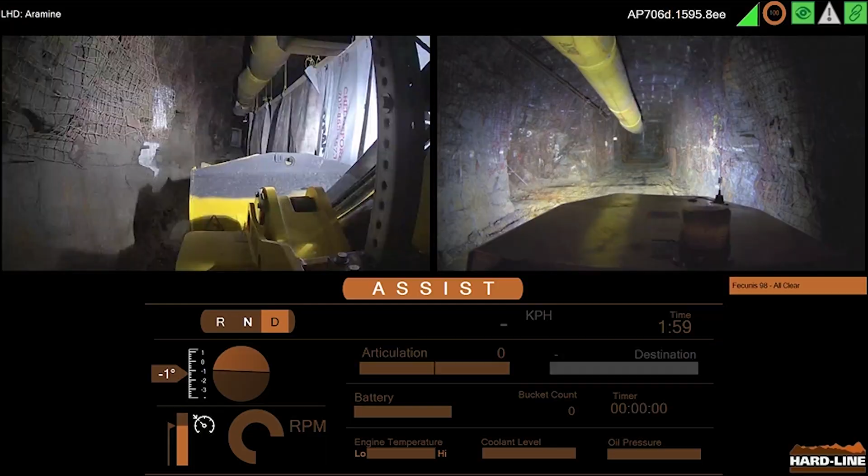Over the next hour, we're going to be showcasing some of our technologies, specifically Teleop Assist. We'll see a vehicle being operated at a mine about 50 kilometers from our location here in Sudbury. The operator will be in Sudbury, Ontario, with the machine in Onaping, Ontario at the NORCAT test facility, being operated both in teleoperation and using our semi-autonomous Teleop Assist functionality. We'll also showcase some of our other technologies and add-ons, and how they interact to give an overview of the different technologies.

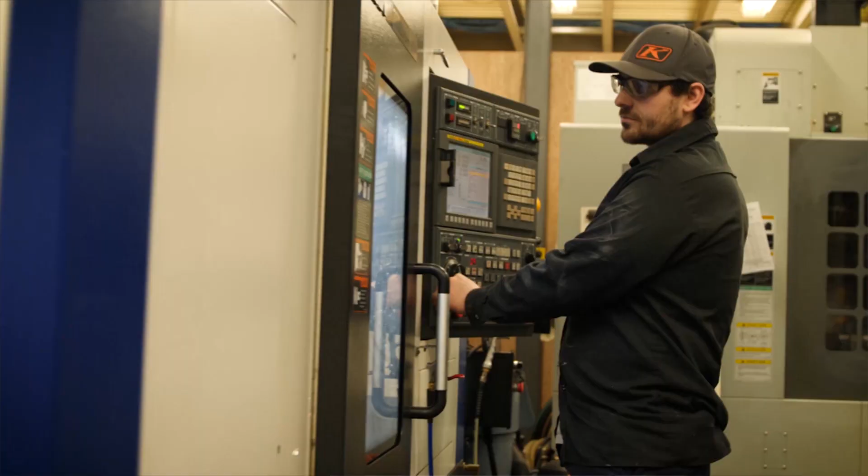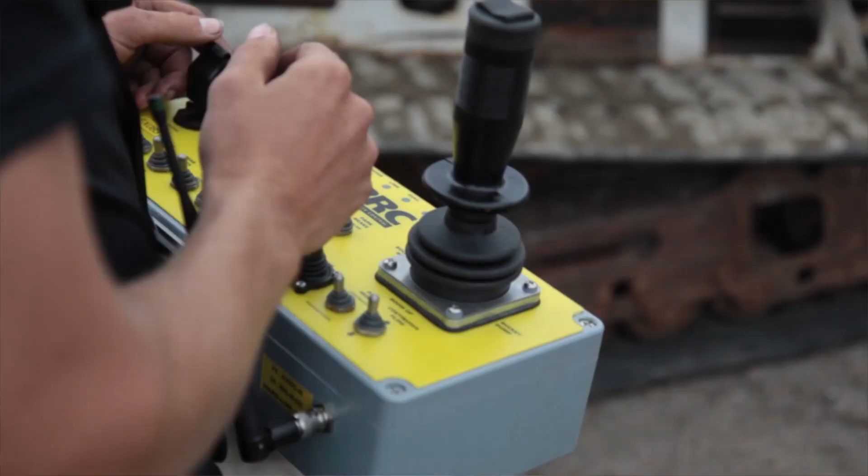Hard-Line is primarily a technology company. We develop, design, manufacture, test, install, and service our products globally all over the world. We've developed several technologies in remote control, teleoperation, semi-autonomous, and autonomous systems for various types of vehicles. We're actually 25 years in existence, starting in 1996, and over those years we've developed many things we'd like to show you today. We started as a service company here in Sudbury, Ontario, and over the years developed our own products, installing them all over the world on various types of equipment, whether remote control, tele-remote control, or autonomous operation.

We started in Sudbury, Ontario, and that's where I am currently. We have two offices here: our manufacturing and headquarters based in Dowling, and our technology center, which is fairly new, in downtown Sudbury core, where development, design, and software development is handled. In addition, we have offices in various parts of the world, including Salt Lake City, Utah for the United States, Santiago, Chile, and Lima, Peru, that handle our South American operations.

And speaking of those offices, we'll actually hear from them right now.

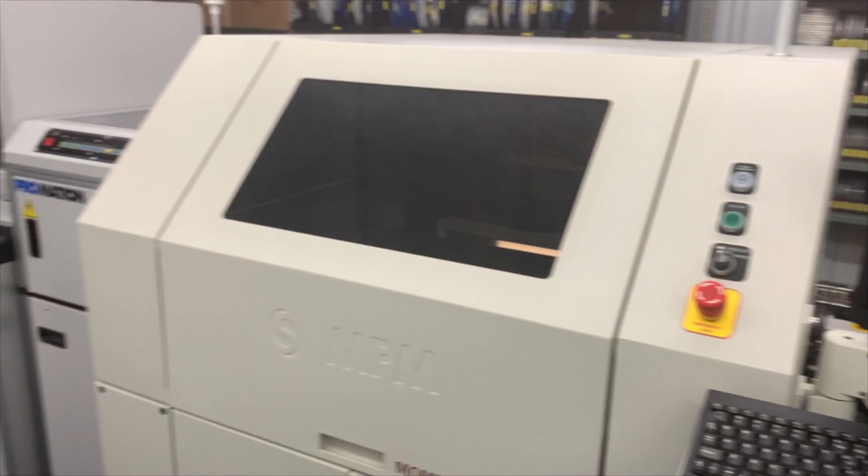Hi everybody, my name is Patrick Roy. I am a service technician for Hard-Line. Here I am setting up Teleop in Northern Ontario.

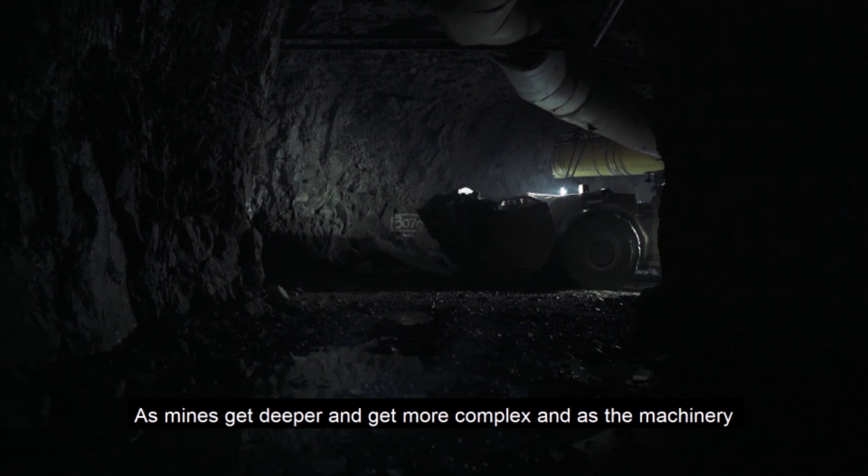Keeping a very strong bond between industry and academia ensures that the courses we offer are relevant. It also means that graduate students we produce from our department have advanced level skills in those areas as well. As mines get deeper and more complex, and as the machinery gets more complex, our technology allows them to be automated.

We have a huge supply of talent. We have leading academic institutions. We have engaged government that supports and cares about the future of the mining industry. Think of how Hard-Line is redefining what it means to have a job in the mining industry.

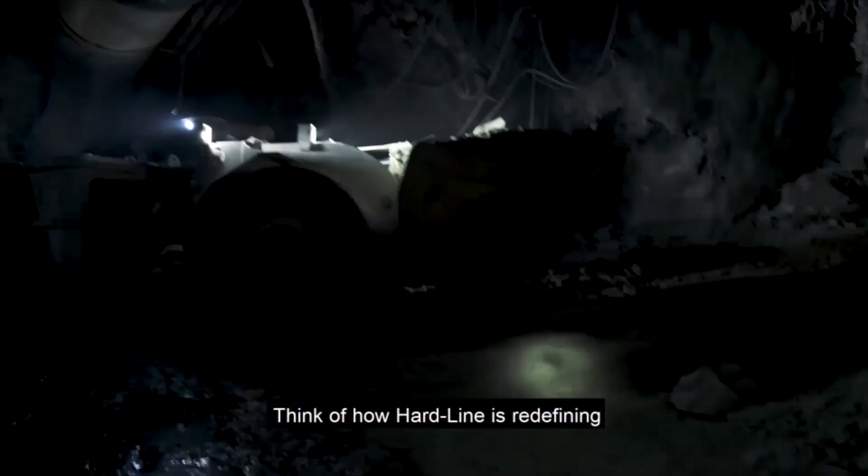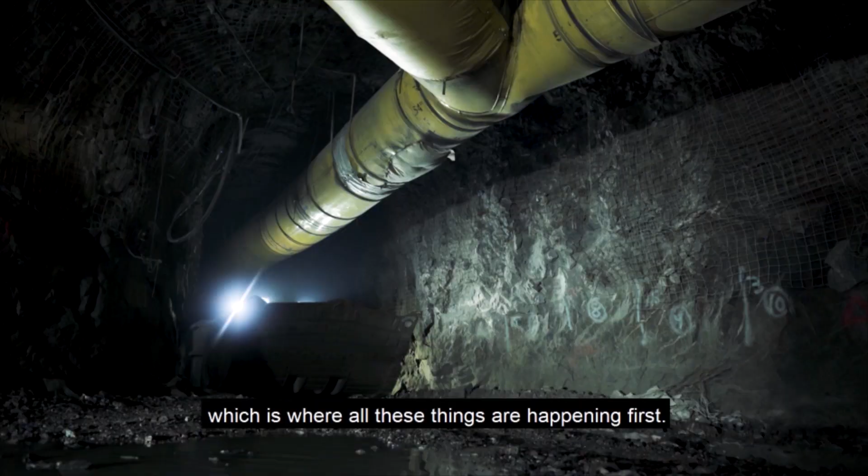It's going to make it more efficient. It's going to make the industry more competitive, particularly the Canadian industry, which is where all these things are happening first. I would say we could get at least 15 to 20% per shift if we can have that operator work in between while we're doing the gas clearing.

Opening up distributorship and partners in different parts of the world, being able to bring our product to everyone is really the goal moving forward. You tackle issues with technology, you solve them, and you create value out of it. And that gives us the opportunity to be very comfortable and productive with the same amount of training involved. That's key for us.

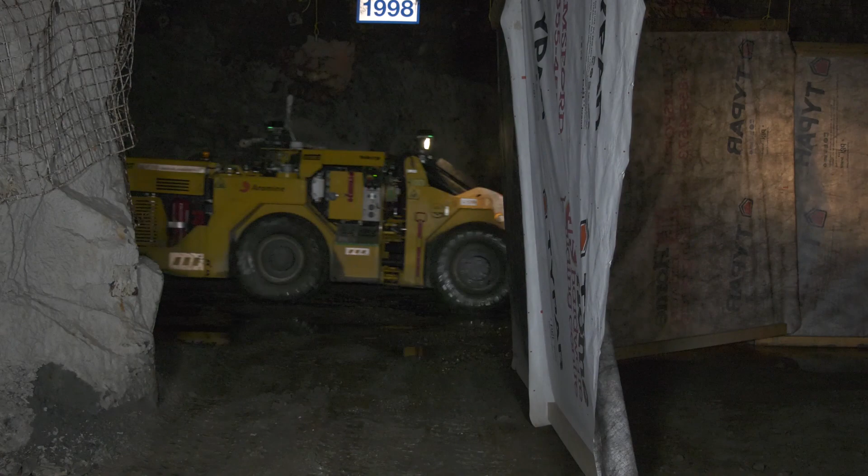For the remainder of the hour of our presentation today, we're going to be looking at Teleop Assist primarily. What we see here is our operator station sitting in Sudbury, Ontario. The machine will be in the NORCAT test facility or test mine, about 50 kilometers away. We'll be operating that from this operator station, going over that network, running it in a semi-autonomous or Teleop Assist functionality. We'll get a lot more into the details of that product line as the presentation goes on.

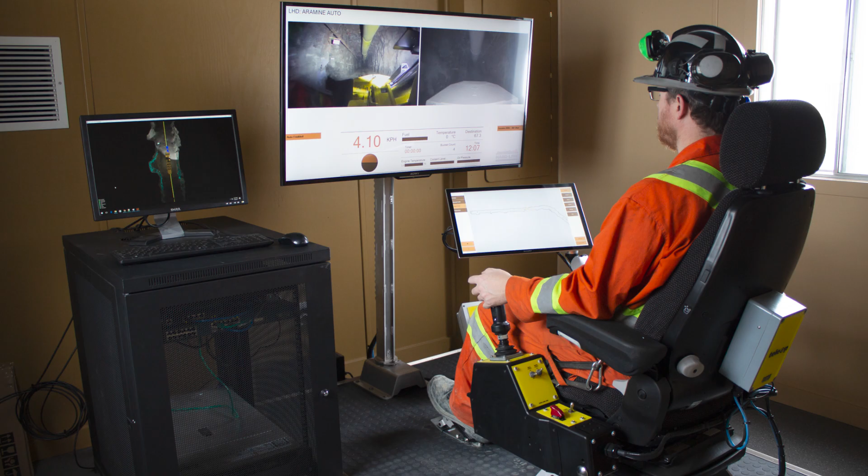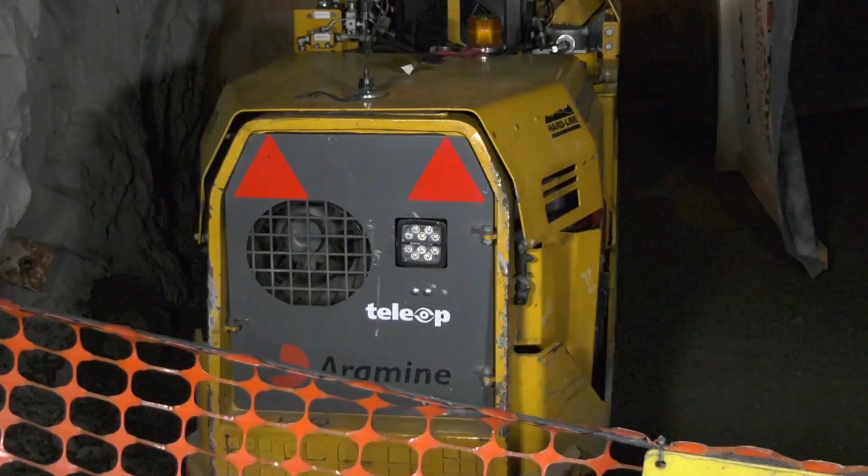NORCAT has been a phenomenal partner for us over the years. We actually rent a space at the NORCAT test mine, a drift that we use for our internal development, and it has been instrumental in developing our products thus far. We have a machine that we've purchased and put in the NORCAT test facility, which we're going to run today, and it's allowed us to go on site whenever we need to, not dealing with the restrictions that our customers face with production and on-site delays. Using NORCAT and partnering with them and having that machine available has been instrumental in our development, so we'd like to thank them for that as well. Today, that's where the machine will be located that we're going to look at.

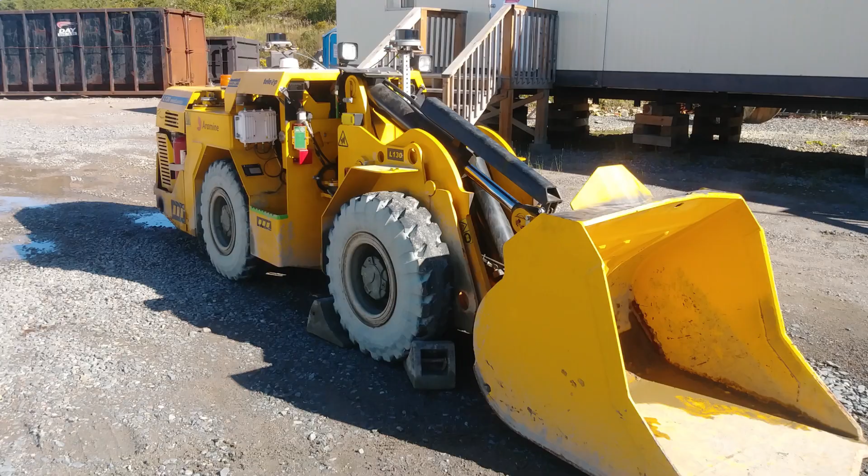So what is Teleop then? As mentioned, it's a remote operating station, so this machine that we're operating has no one in the cab. There, in fact, is no cab on this vehicle that we're going to be operating today. The operator will be in this chair. All the functions and controls of that machine are brought back to this operator station so that they can fully remote control it from a distant location.

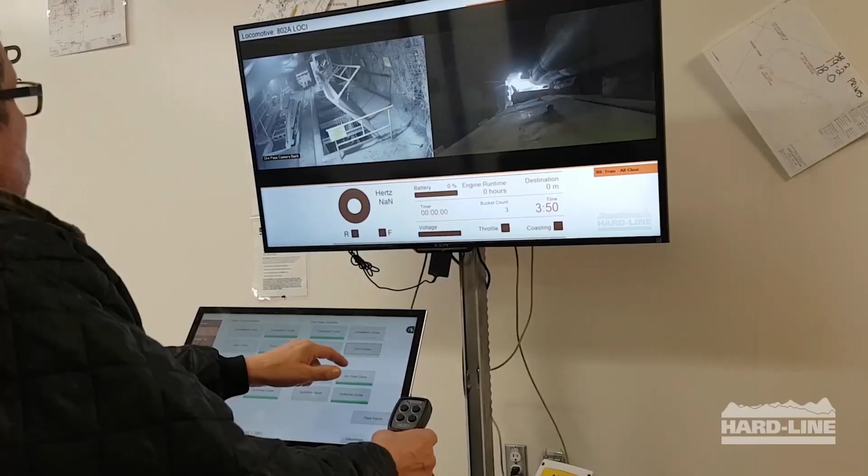Teleop as a whole, currently, as mentioned, we're about 50 kilometers away. This can be installed on-site, on surface, underground, in a portable cabin or personnel carrier. It can be installed in a different office like we're doing today, about 50 kilometers away, or even large distances away as the need may be for operators to be further from the operation of the mine site. For example, one of our implementations in northwestern Ontario is a remote site where the operators have to travel in and out of the site, and the operator station is actually installed in an urban center where the mine site is not.

It's only by fly-in travel, and it's allowed them to have the operators in the urban center and operate the equipment at the mine site, which is about 400 kilometers away from the operating station itself. So that was Teleop, our base system.

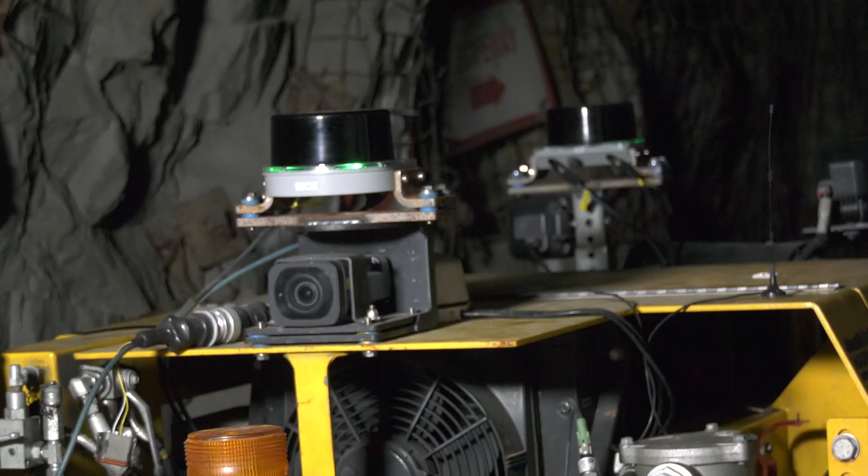Next, we'll be talking about our Teleop Assist add-on, which is an add-on to Teleop. Teleop Assist is a semi-autonomous system that is added to Teleop, and it enables the vehicle to drive down the tunnel or drift, minimizing damage to the piece of equipment. It uses 3D LiDAR technology to scan its environment, to perceive its environment in real time, and make driving decisions in real time as the machine travels the tunnel.

The operator is in control of the speed of the machine, the braking of the machine, but our assist system is in full control of all the steering functions of the vehicle, allowing it to drive at faster speeds and go with less damage to the equipment.

So you've heard the explanation. Next, let's see it in action. Jeff Yoki, our Quality Assurance Supervisor, will be handling the demonstration and showing the functions of the system next.

Thanks, Ryan. So here I am in our downtown office, Technology Center in downtown Sudbury. It's a very comfortable space to be operating a scoop. I can tell you I'd much rather be here than underground.

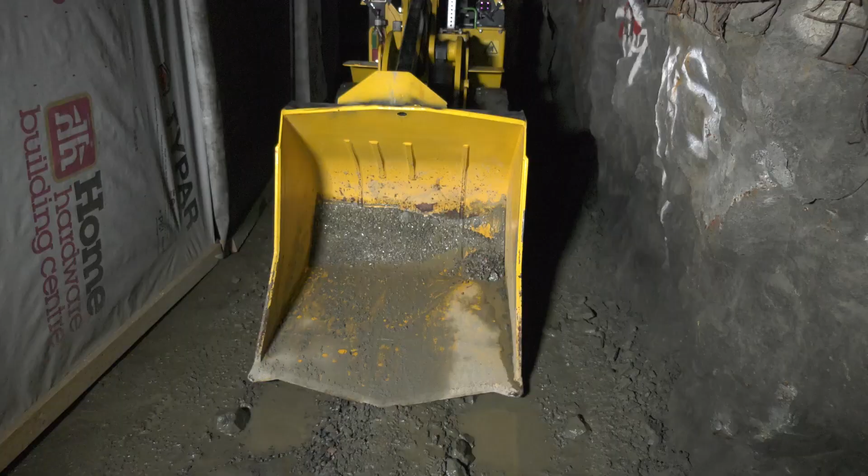Right now I'm connected to a scoop in our test center at NORCAT underground, about 50 kilometers away from here. On site there we have Marty, our automation support specialist. He's on site making sure everything goes smoothly on that end.

The scoop that we use here is a pretty small one, so we had to tighten up the drift so that it could resemble a real life situation a lot more. You can see that there's very little clearance on either side of this machine. It's running a very tight drift.

So if I were driving this thing myself, in control of the steering, it wouldn't be pretty. I'd be scraping the walls, I'd be bumping the walls for sure, I can tell you that. So what our assist feature does is it's taking care of the steering for me.

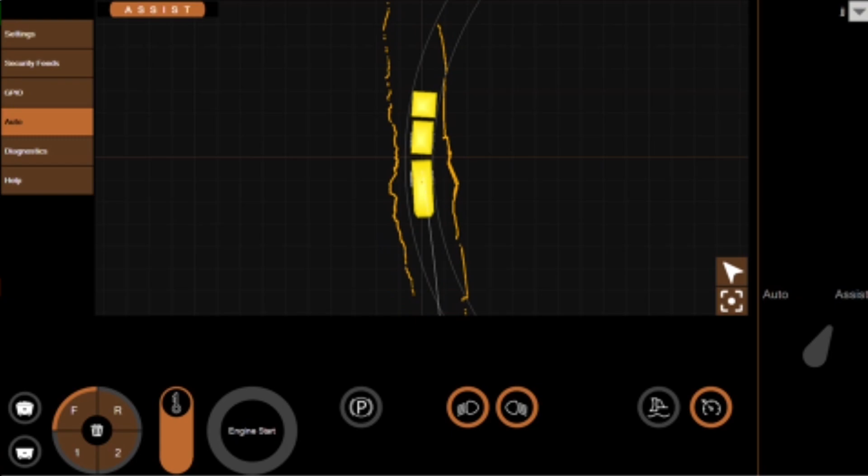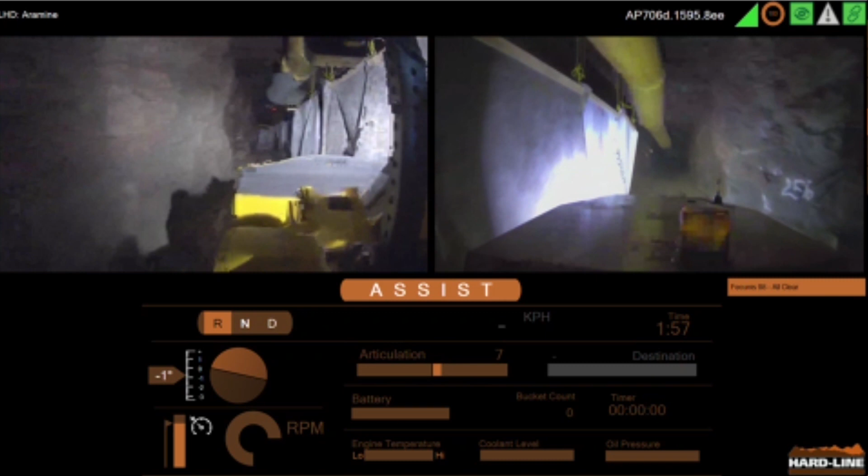As you can see, one hand on the joystick controlling throttle, and that's it. That's all I have to do. And the assist will keep this machine going straight down the drift. It'll articulate itself, keep it centered, and I really don't have to worry about much more than telling it how fast I want it to go, or whether I want it to turn left or right at the next upcoming turn.

Another thing that I really like about this system too is our cruise control. That'll simplify things even further. I can engage cruise, and at that point I don't even need to be telling the machine how fast or slow. Literally I can have my hand off the joystick, it'll be controlling speed, it'll be controlling steering.

When I get to a particularly difficult corner that I know is coming up here, I can just back off on the throttle a little bit. I slow the machine down just so it can give it a little bit more time to make that corner, and when I know it's past that bad corner, I let go and cruise will put that throttle back up and my machine will pick up speed again.

So I'm about to drive this scoop through our course. We've narrowed it down. It's very tight, there's very little clearance on either side of the machine. And as I get going, you're seeing I'm heading straight into a T, straight wall ahead of me.

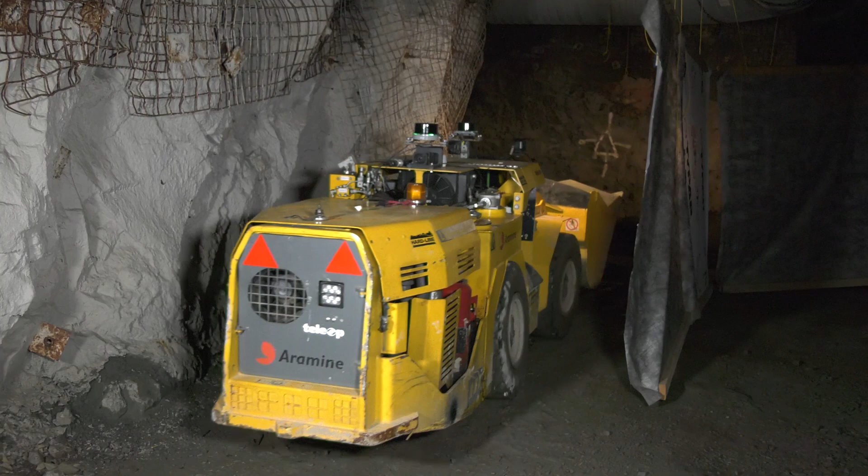So I don't need to steer that machine myself. It would be very difficult. I'd be hitting the wall for sure if I did. All I need to do with assist is say, I want you to go right. So I'm going to head up forward, and you'll see that it navigates that turn way better than I ever could as an operator. And the machine takes off right around that corner, no sweat.

Now as I drive through the drift, it's one hand on the joystick. I don't need to be steering. Assist is doing that for me.

All I got to do is give it a little bit of throttle, and it will make the turning decisions for me as an operator, keeping my machine centered.

So that was a little demonstration of our Teleop Assist. You can see it's got a lot of benefits that make driving easier for the operators and reduce machine damage.

But Assist is not our only product. We've got a lot more to offer on our Teleop and our Teleop Auto lines, each with their own benefits that will target a different aspect of the mining industry. So Ryan's going to talk a little bit more about that now. I'll pass things back over to Ryan. Thank you very much, Jeff and Marty.

So next we're going to go to the operator station and actually show some of the extra additional upgrades to Teleop, including the system's touchscreen interface, login menu, control station functions, as well as the Teleop Multi and Teleop Auto.

So now that we're in the Teleop operator station, we can walk through some of the additional add-ons or other features of Teleop. When an operator sits in the Teleop operator station, they would be at a login screen. Every operator has their own unique username and password that they would use to log into the system. Once they do that, they would need to select the vehicles that they would like to control.

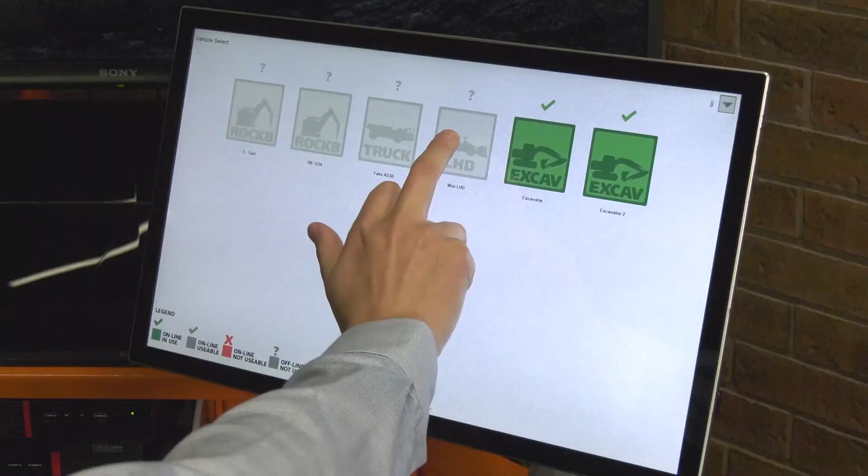So we'll first talk about Teleop Multi. Here on the screen there's various types and numbers of vehicles, different makes and models, that can be operated from the Teleop operator station. Here we're going to select two vehicles. We're going to select one underground LHD.

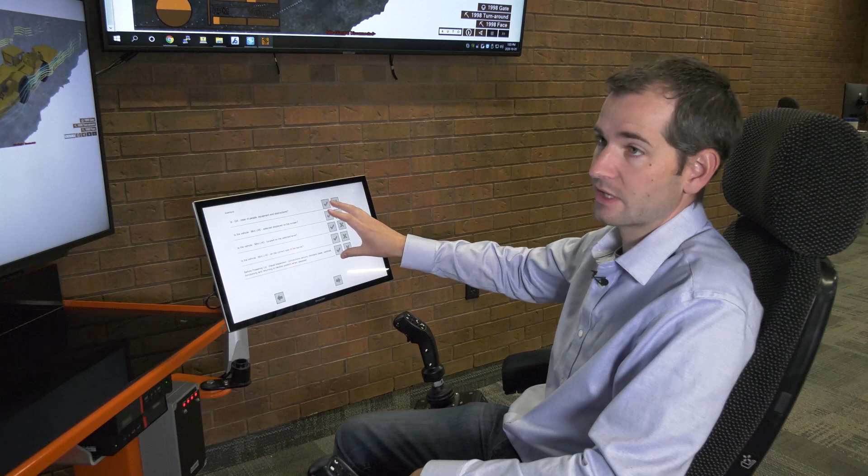The operator here is presented with a series of pre-operation questions. These can be customized on a per-site basis or even a per-machine basis with specific questions that the customer would like the operators to answer. After answering these correctly—they could be yes or no questions—it allows that machine to be operated. Next, we'll add another vehicle.

So notice I added an underground LHD. I'm also going to add an excavator. Here, it's presenting what work zone that vehicle is going to be operating in for that day. And again, there are questions about that specific vehicle and area that need to be answered correctly.

Once they've selected the vehicle that they want to operate for that shift or time, they would hit the start button, which would load them into the operation side of the Teleop system.

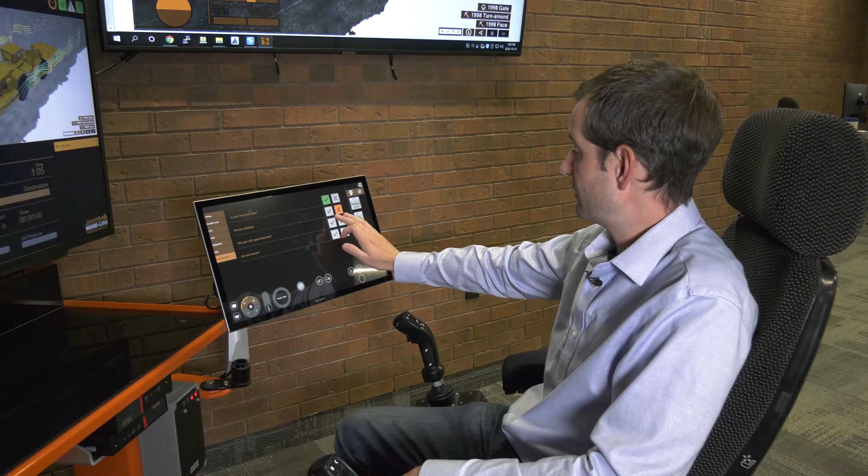Switching to the other vehicle, we have the same questions that are required to be answered for that vehicle.

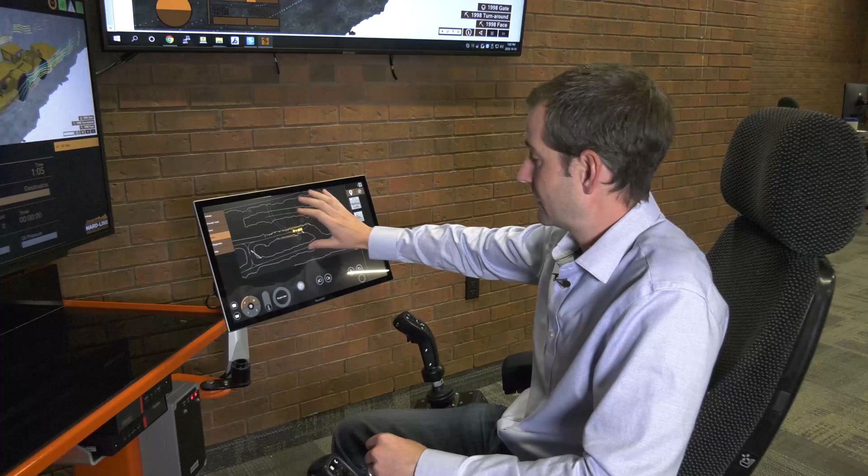To highlight the main features and benefits of our Teleop multi-system, here we have an underground LHD set up for Teleop Auto. It's in the level, actually at the Facunas mine. We see a 3D map of the Facunas mine here, and the controls currently on the screen are for an underground LHD.

The functions on the joysticks are all generic for any vehicle. Whether it's a bulldozer, an excavator, a rock breaker, a locomotive, or an underground loader, all of the joystick functions can be used for any vehicle. We can see here that this screen shows us what all the joysticks and functions do for the specific vehicle we're currently controlling.

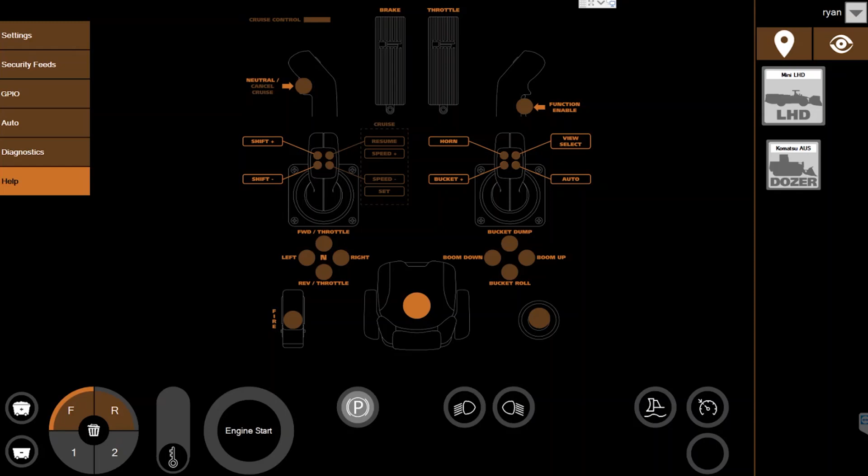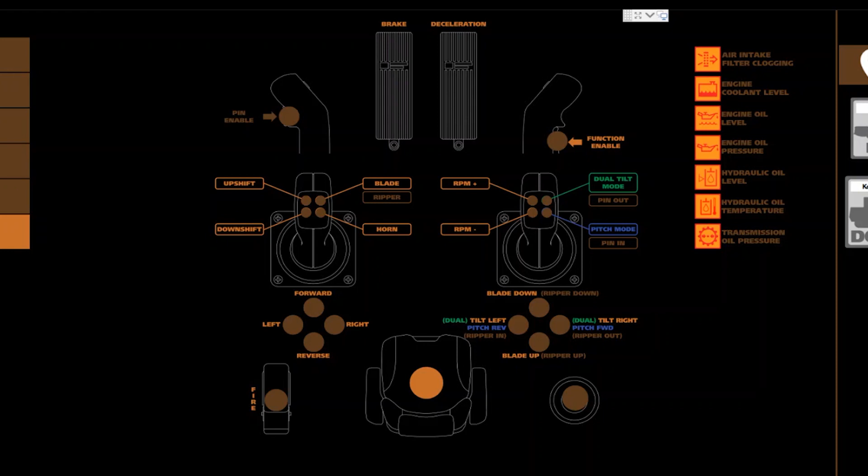If we switch to the other vehicle, we see that all of the functions for the joysticks for that vehicle are shown now on the system. All of the joystick functions are now mapped to different functions for the specific vehicle, being a dozer or a loader. We see that on the screen in front of us here as well.

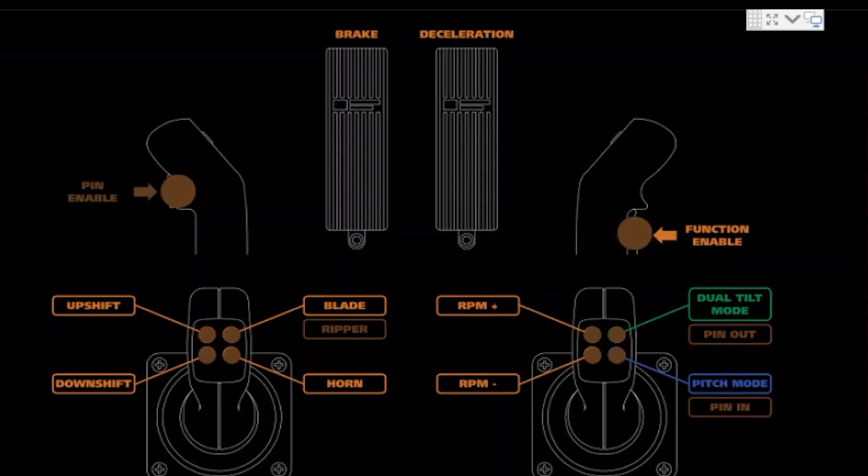All of the functions specific to a bulldozer update automatically for the throttle, park brake, and ripper functions that would be specific to a surface bulldozer. In addition, when we switch between vehicles, all of the video feeds, telemetry information, and alerts that come from the vehicle switch automatically for the operator.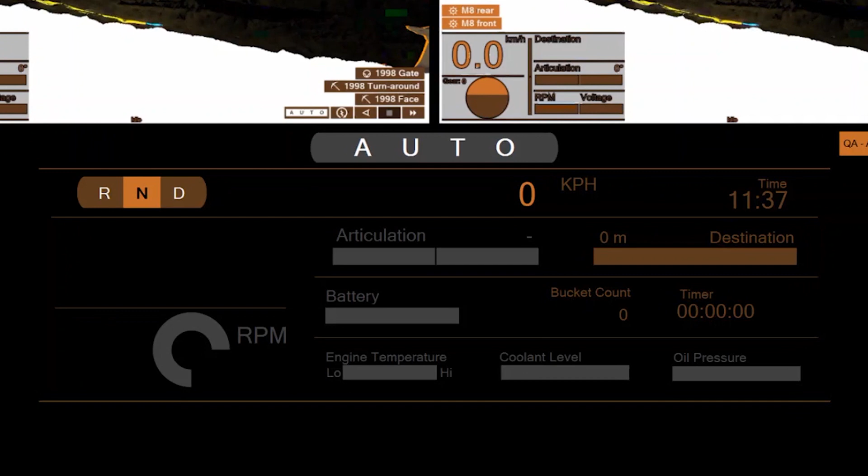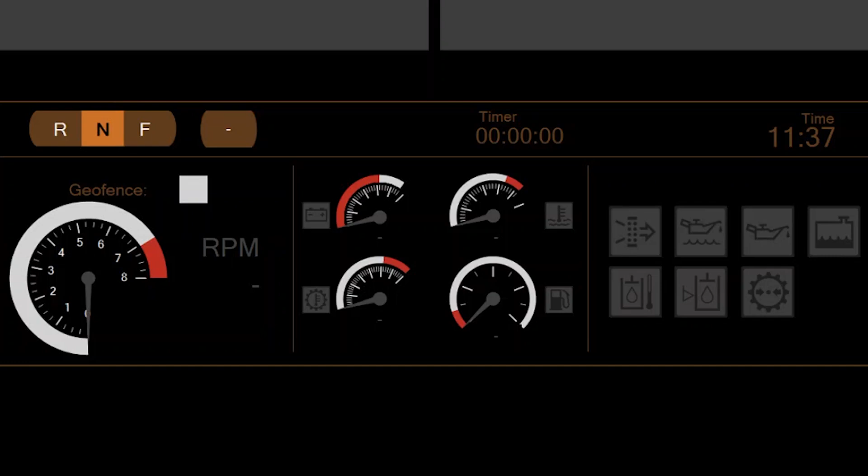What we see on screen currently is telemetry for an underground LHD. Switching to a dozer, all the telemetry updates automatically to the telemetry for this specific bulldozer. That's our Teleop multi-system: the ability to have multiple vehicles, multiple types of vehicles, multiple numbers of vehicles, all controlled from one operator station.

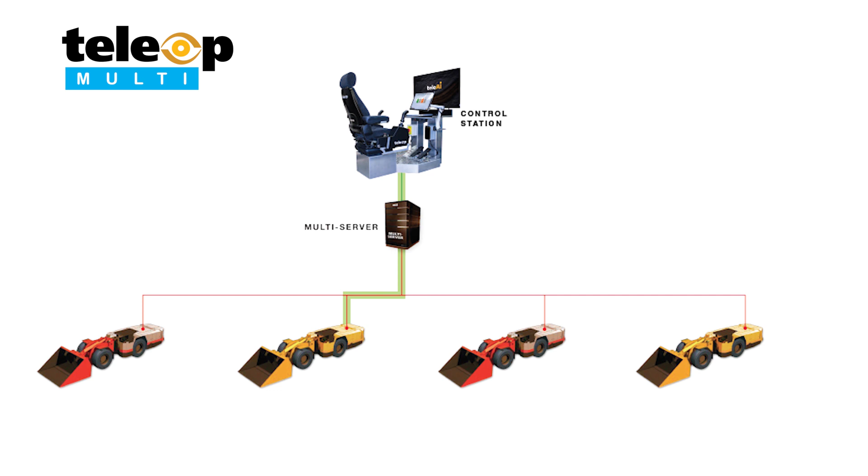Next, we're going to look at Teleop Auto for underground LHDs. Here we see an underground LHD in the Norcat mine where we were just operating our Teleop Assist system, but now we're in full autonomous mode. With Teleop Auto, the steering, braking, and throttle decisions are all made by the Teleop Auto system, not the operator. They put it in autonomous mode, and then it's very much hands-off after that.

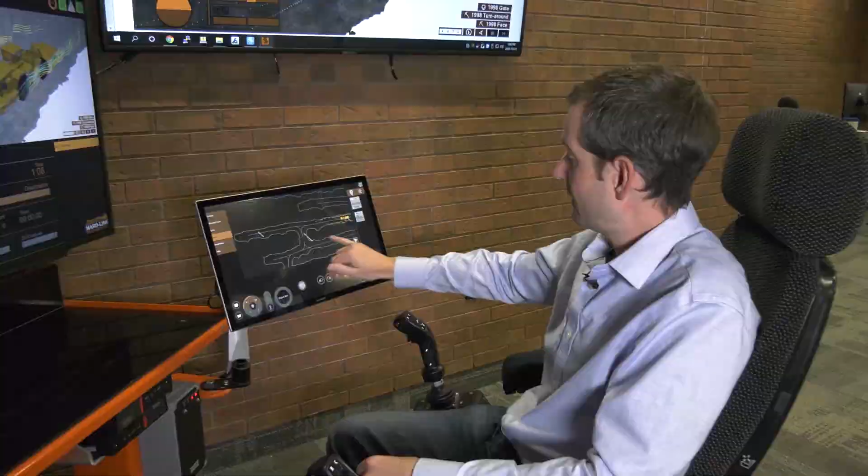Here again we see our vehicle. There are areas where the vehicle is allowed to drive and areas of the mine where it's not allowed to drive. There are predefined paths that operators need to add to the system so the vehicle can run in that area.

So I'm going to start our machine now. We'll release the park brake, allowing the vehicle to drive. Auto engaged, and now we're able to engage auto on this vehicle. The vehicle is parked right here, and we see the driving line that it can drive on.

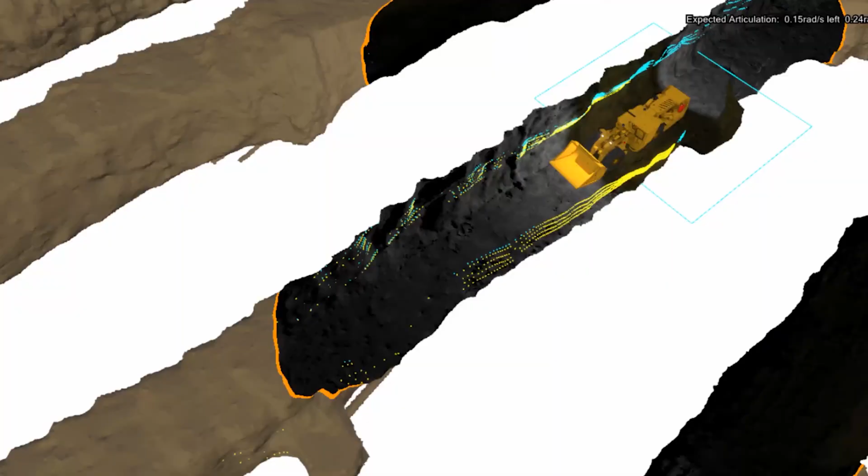At this point, the operator can select predetermined areas where the machine would drive to, for instance the 1998 face turnaround gate. They select that from this menu, and driving started — that's how they start the driving.

Or if there's no predetermined area where the machine is selected to go, and it's in the middle of an area, the operator can select that easily as well. To show that, we'll stop the driving and select a spot along the route that the vehicle will drive on. Driving started.

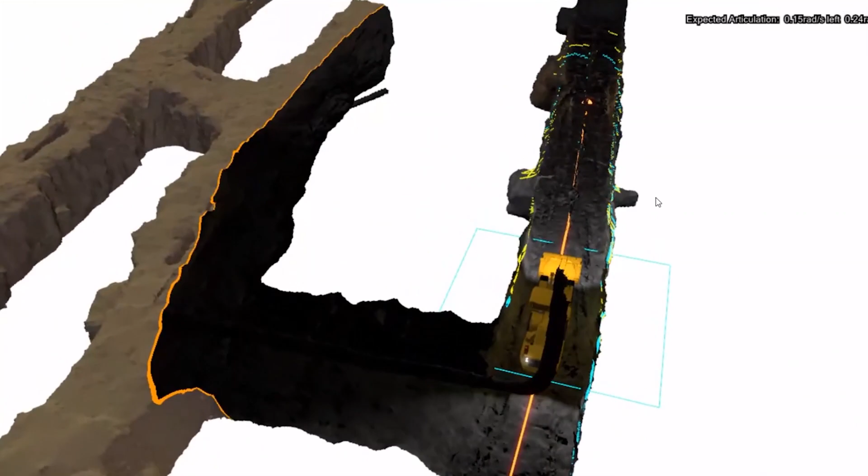As mentioned, with Teleop Assist there's very little setup time — it's very quick to set up, very quick to move from level to level. With Teleop Auto, there's a setup required for the vehicle to run autonomously in this zone, which involves a 3D mapping process. But again, it's very hands-off for the operator, with all the functions autonomously or automatically controlled.

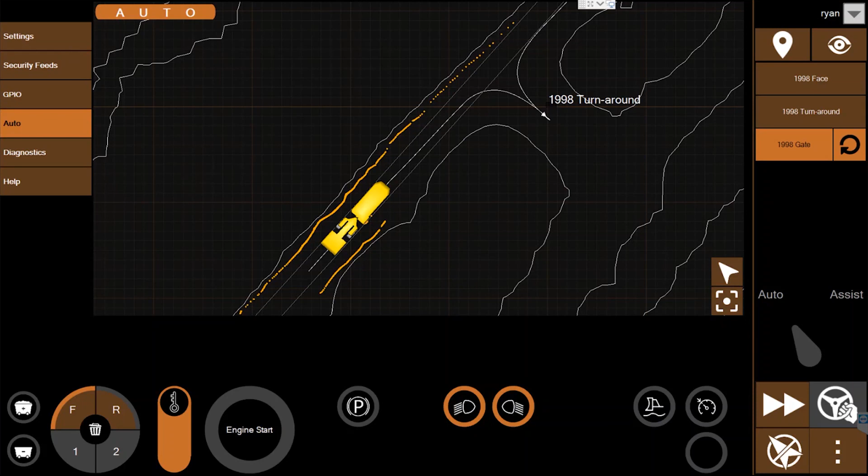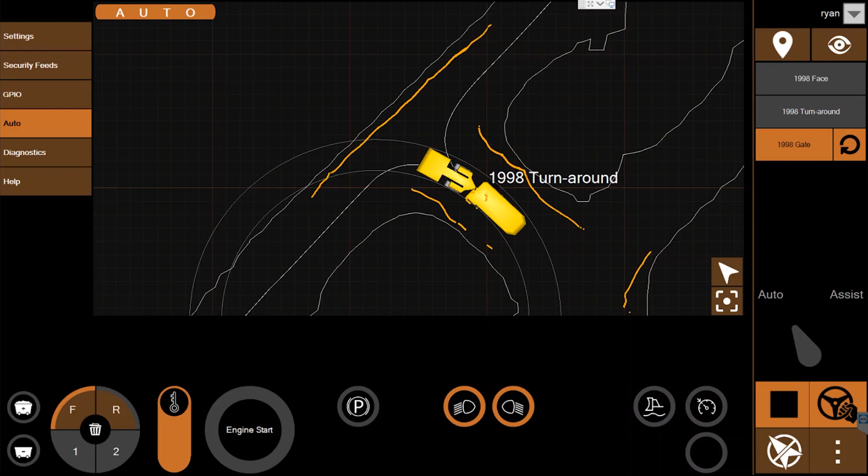In this instance, the vehicle needs to be pointed in a different direction at the other side of the map. So we're required to enter a turnaround point where the vehicle pulls in, turns around, and continues driving in the other direction to arrive at the destination in the right orientation required for this specific application. This can be completely customized on a per-level, per-machine basis.

The next function of Teleop we wanted to touch on is the ability to control or read sensors from auxiliary devices that might be involved in the system. We have our general purpose input-output modules, which we're going to talk about more in just a second.

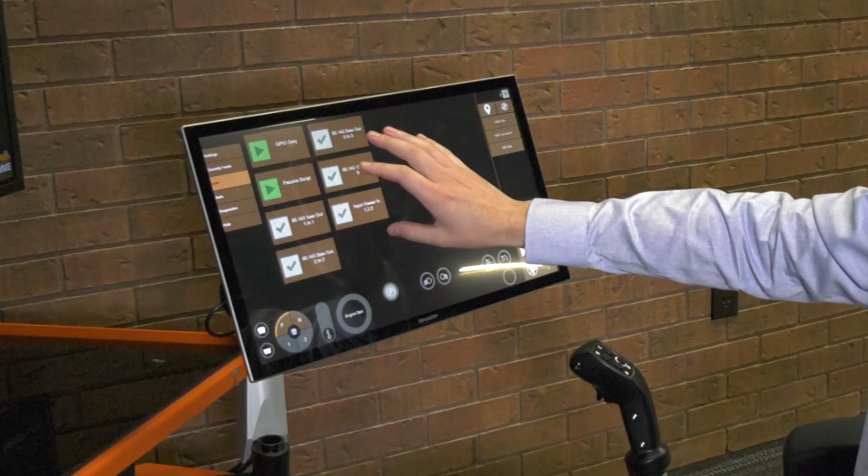From the operator station here, on the GPIO screen, we see that this operation for this level is set up with specific outputs and inputs from other modules that need to be controlled from the system. These can be set up as momentary buttons, as on-off buttons, or even as scripts.

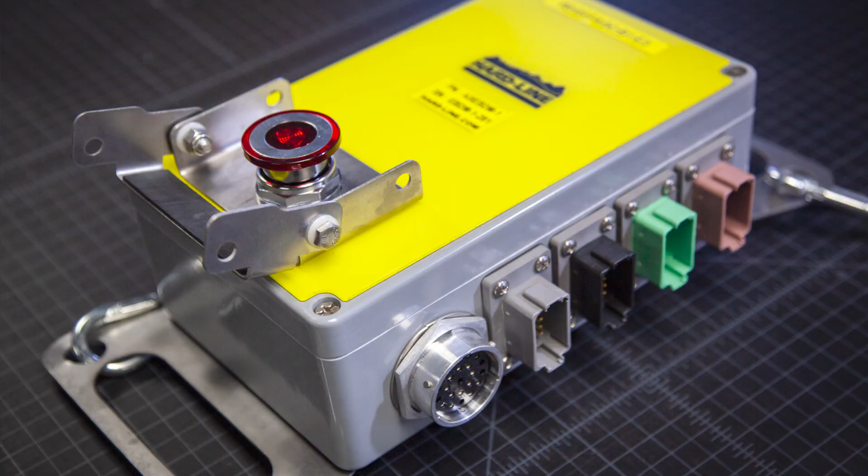If there are fully autonomous functions that need to happen which are very much scripted, that never change and are static in every way, these can be set up to run a script of functions in a predetermined order — to open or close doors, turn on water sprayers at certain times in the cycle, or whatever that might be. That's all configured through the system to be controlled from this GPIO screen. So any Teleop system that's installed — Teleop Multi, or whatever upgrade they might be — these are installed.

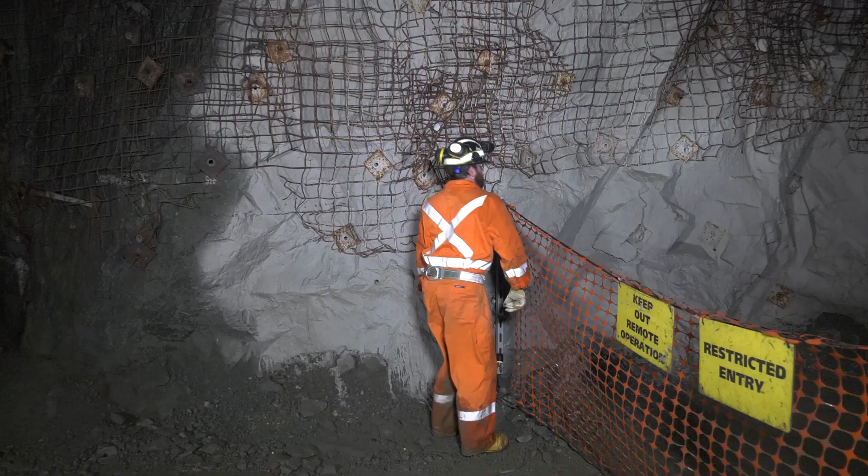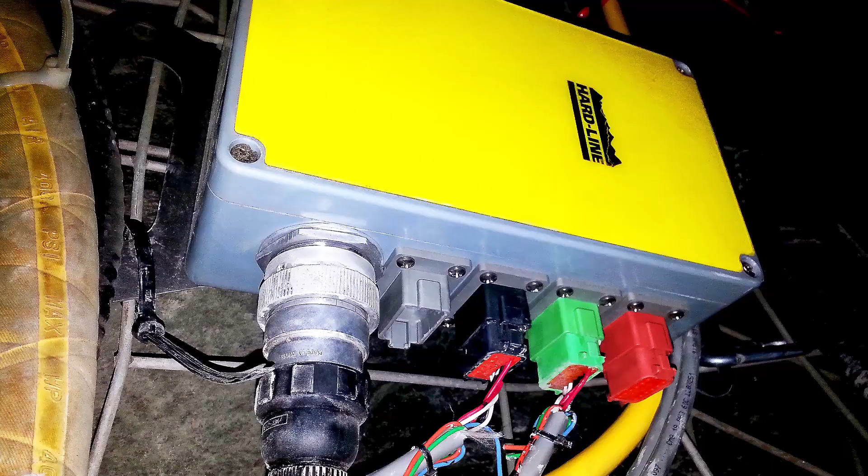Every entrance to a Teleop zone has one of these installed that notifies the system if somebody was to enter a Teleop enabled zone. From these connectors, we would connect to either a physical gate that we would install or a light barrier, a light beam installed across the tunnel or area they're coming into. If anything breaks that beam, this device notifies the system and issues an e-stop to any vehicles in that work zone.

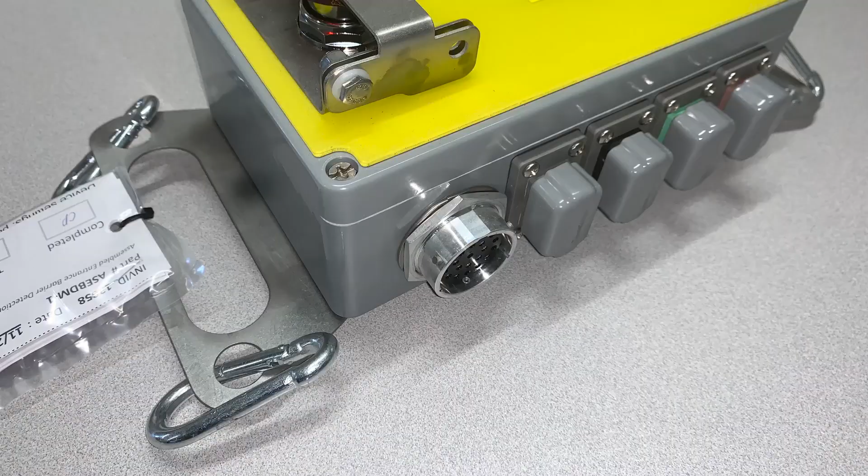There's a local e-stop connected here, as well as a way to lock that e-stop in place if required. It uses a local e-stop or an external input to let the system know that somebody has entered or potentially entered that area.

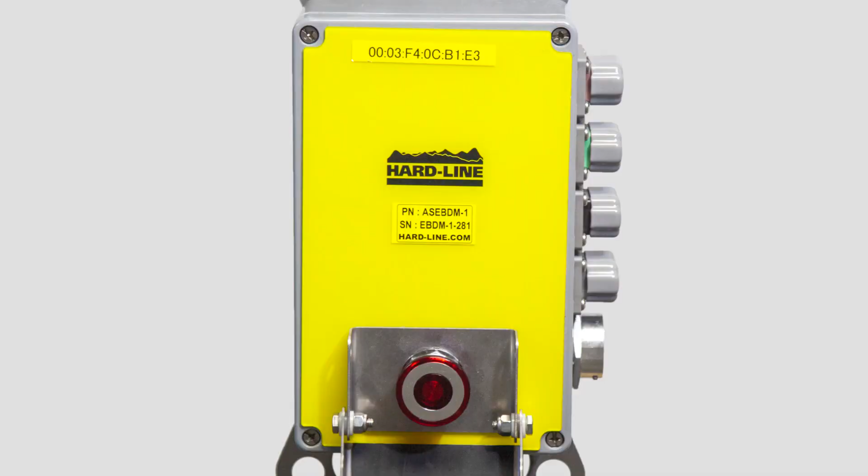In addition to that, it also functions as a general purpose input-output module, or GPIO module. These additional connectors installed on here can be connected to other devices that we might need to control in the mine site.

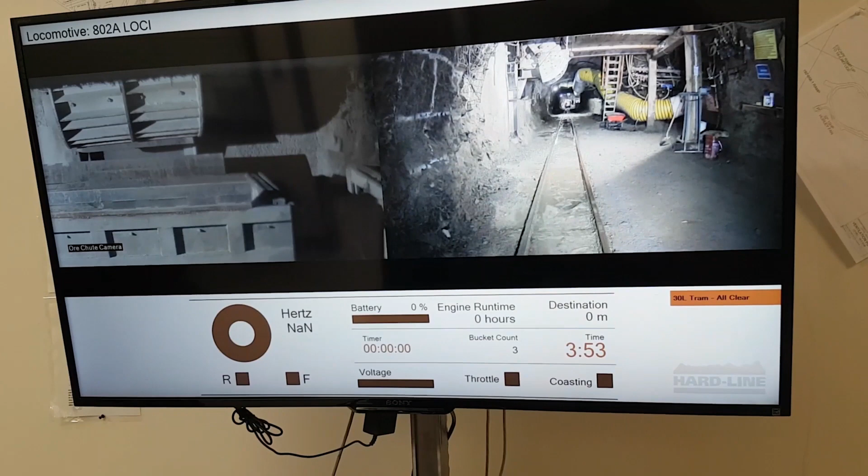A lot of times in an application, there's going to be a machine that has to dump in an ore pass or get loaded from something, or in applications with LHDs, there's water sprayers required to wet the ore they're pulling out. These devices are installed so that from the teleop operator station, operators can turn on and off these auxiliary devices that need to be controlled as part of the system.

So inputs from sensors, inputs from light beams, inputs from other types of devices that might be involved in the total teleop package would connect to here, as well as our barriers. And one of the big differentiations, benefits of teleop, is this GPIO capability.

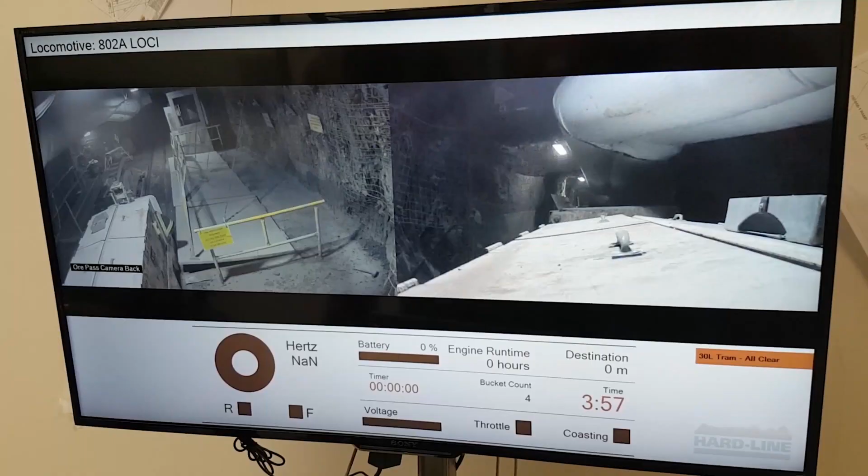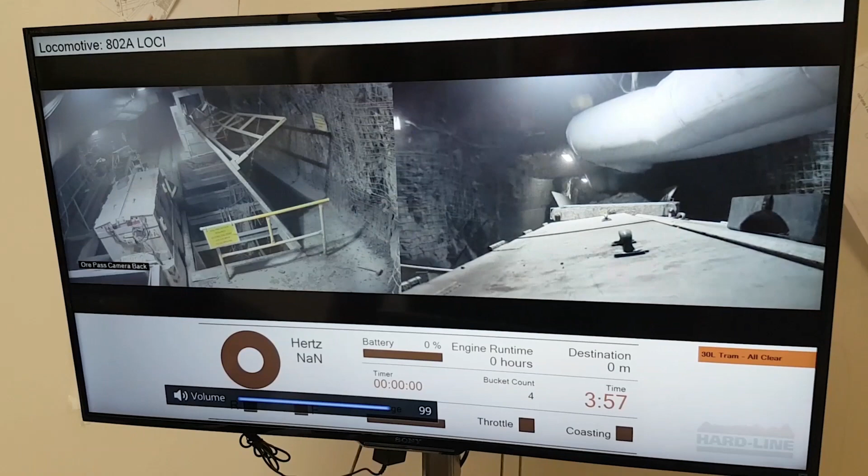For sites where the machine is automated or teleoperated, it doesn't help a whole lot if somebody has to manually open a vent door or an ore pass door that the machine is dumping into. So with teleop, using these GPIO modules, the operator station can open and close these seamlessly, all tied into one system. It's very much a whole package, a whole solution for remote or autonomous operation.

So that was an overview of our teleop suite of products: teleop, teleop multi, teleop assist, and teleop auto. In addition to that, we have many more innovative products that we'd like to show you.

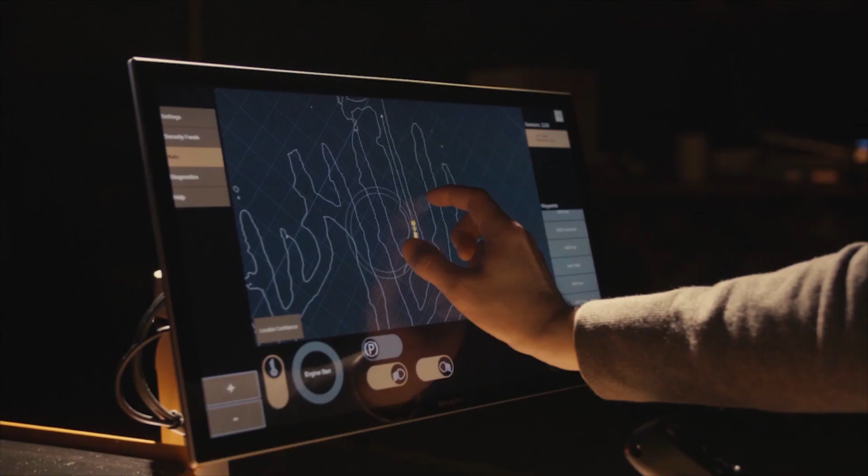This company has actually developed something that's pretty unique, so the impact is big. When the company started, the vision was to build a better radio remote control system. All the systems that were available had been adapted from other industries; they hadn't been specifically built for the mining industry.

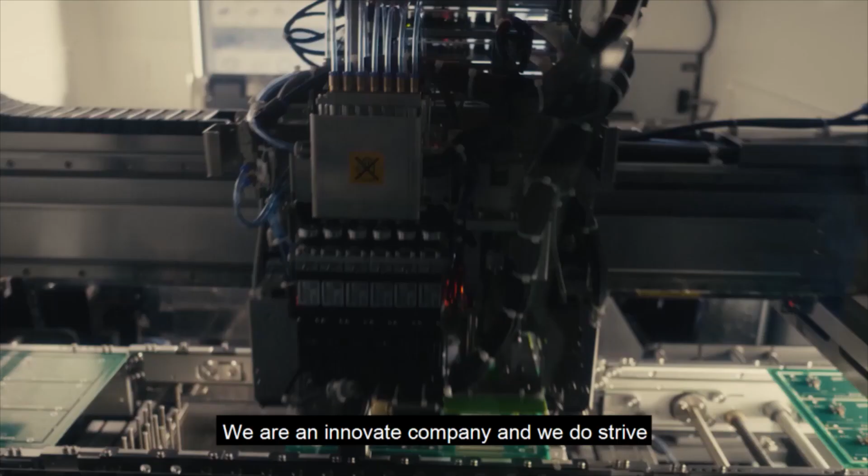Research and development is a huge part of what we do. We're an innovative company, and we do strive to push new innovative products all the time. We're not a systems integrator. We design those boards; the real-time operating system is our operating system. All of those types of things give us a finished product that we have total control over.

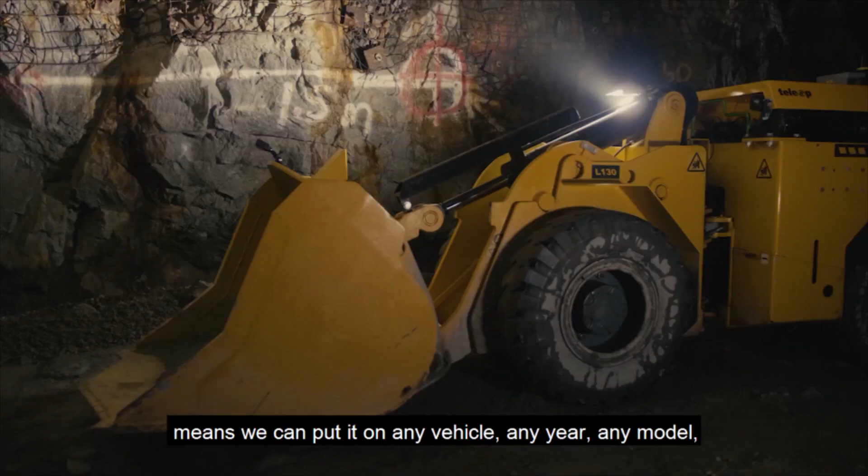The teleop is the core of the whole system, so it's where everything starts. The teleop system is hardware agnostic, meaning we can put it on any vehicle, any year, any model. The truck that's driving across the level, we can automate that truck across the level. The rock breaker that it feeds onto, we can run that rock breaker from the system.

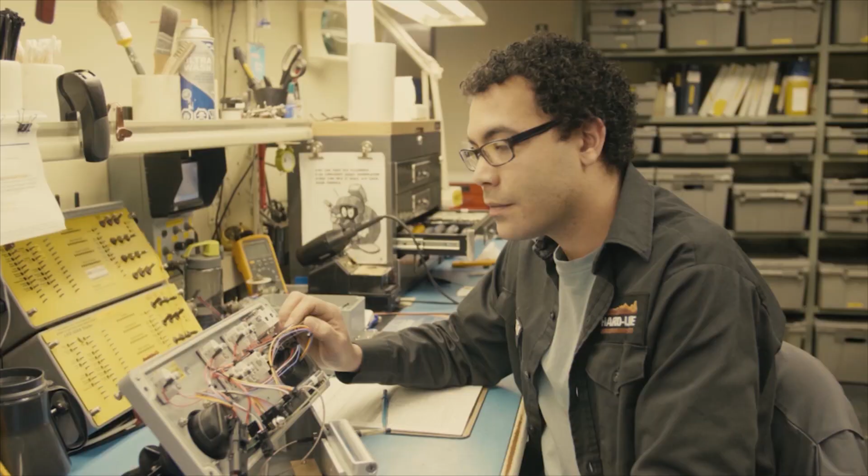The other part of the scenario is you have to increase productivity safely. The teleop system allows operators to stay on surface, gets that extra production out of the mine site, and keeps them out of danger. That's been our goal: to continue putting innovative products on the market forever. This is changing the way business is done.